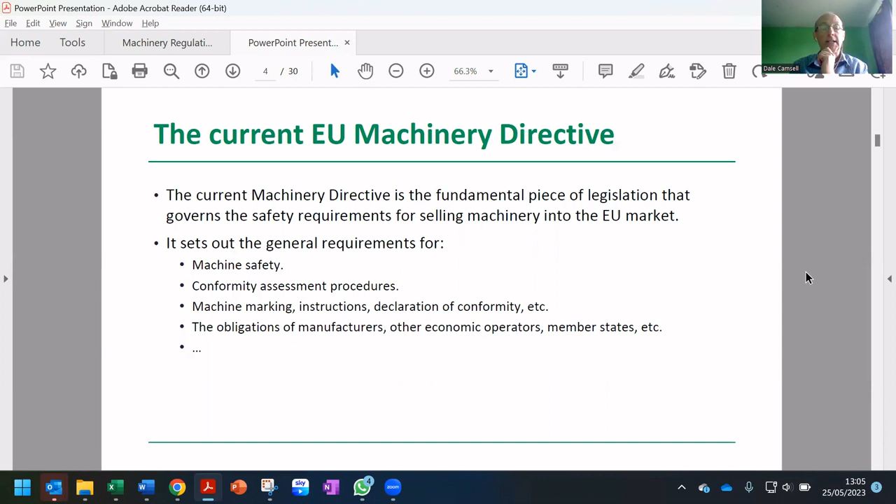So, today's topic then, the revision to the Machinery Directive, in other words, the creation of the new EU Machinery Regulation. The directive is the fundamental piece of legislation that is in place at the moment for putting machinery into the EU market. It sets out all the major requirements for all aspects of machine safety, and I've identified some, not all, of the major aspects of the directive there, and it's been in place for some time.

It was first published in 2006, but it's been in force since 2009, so some number of years, and due to that time lapse, the European Commission felt that there was a need to update it, mainly to take into account the rise in new technologies, those new technologies being artificial intelligence, autonomy, cyber threats, as well as other advancements in digital technology. So there was a need seen by the European Commission.

Not all stakeholders felt that it necessarily needed to be updated, and they felt the existing provisions adequately dealt with these aspects, but the European Commission and probably most member states felt the need. So the revision process has been underway for some considerable time, actually. We've seen more rapid progress in recent times, and we are just about on the threshold of it being published. I'll come on to the status in a moment.

Just want to highlight, though, before we go into the technical aspects, that although the UK has now long left the European Union, the CEA is still a main player in CECE, CECE being the Brussels-facing Pan-European Trade Association, of which CEA is a member. Our membership was not affected by Brexit, and we still play a very active and contributory role to CECE activity.

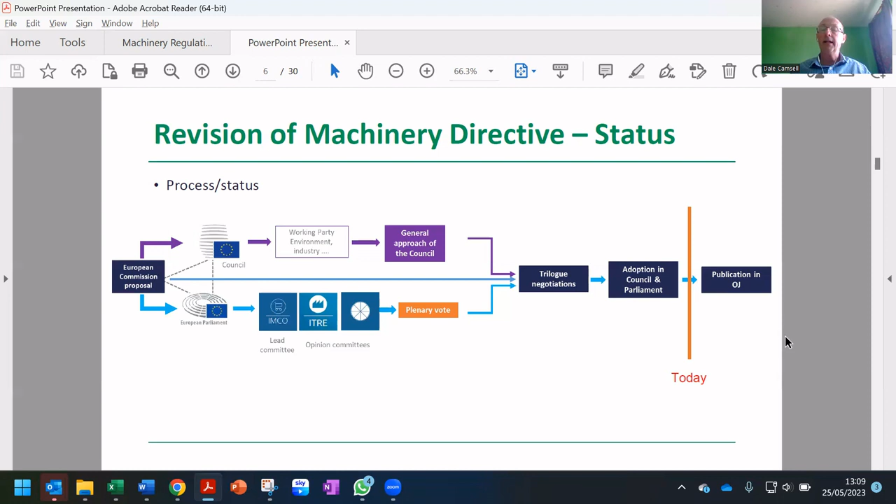The only outstanding items to go through are the legal linguistic checks, just to make sure that the regulation is fit for purpose and translates well. But in terms of all the technical aspects, that is all now complete. We haven't quite seen the publication of the regulation yet, but we are expecting to see it in early July, so very shortly should see the citation in the Official Journal of the European Union.

Sorry to use jargon, but this is the correct terminology, which basically means publication of the fixed and final text of the regulation. It will then enter into force 20 days later, so we would expect that to happen in late July. That's not really anything of consequence initially, at least for manufacturers in terms of compliance with machines. There then follows a 42-month transition period before the application date of the machinery regulation, and that means it will be applied from sometime around January 2027 if these dates are held.

On the same day as the machinery regulation is applied, the existing machinery directive will be repealed. So we'll have a switch over at midnight from one regulatory regime to the other. I'll come on to the challenges that will cause us in a moment, but just to say that the legal text will not formally become available until this happens, until July 2023. So a few weeks away yet.

However, the European Council is obliged to publish the documents that it is voting on, and since it has formally voted to approve the text, and the European Parliament had already voted to approve the text, what is likely to be the very final version of the text is available. That has been uploaded to the CEA's technical library. If you click on that link when you receive this document, you will be able to see it. The only changes that might happen between now and the publication, as I say, are following any legal linguistic changes, but that will be more grammatical changes, not changes to the substance of the text.

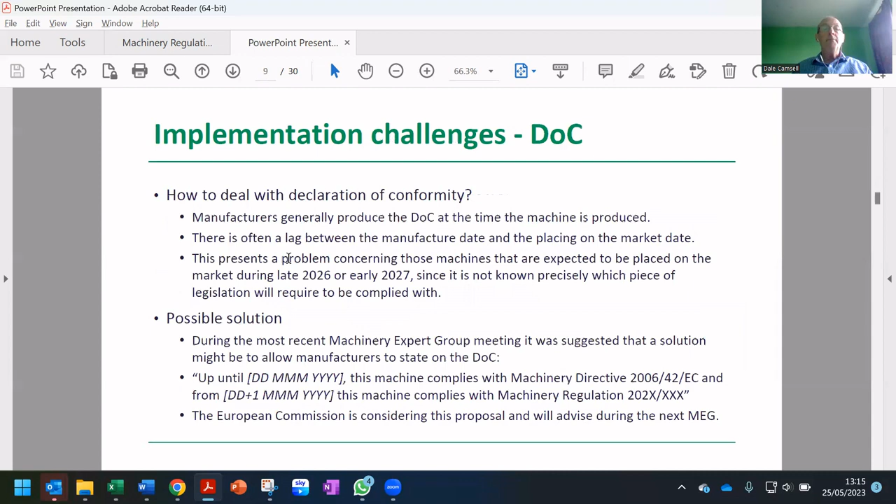So let's jump back again. A bit of a spoiler here. Digital instructions will be allowed. I'll come on to this later when I go into some of the technical details. So yeah, just jumping ahead slightly. Digital instructions are allowed, explicitly allowed in the new regulation, and we were hoping that they would be able to be implemented as soon as the entry into force of the new regulation is upon us.

However, because of this situation where at the moment the existing guide to the machinery directive states that paper instructions, so when I say instructions, I mean operator's manual. Different companies call them different things, but in legal terms it's the instructions. So the operator's manual is expected to be provided in paper at the moment because of the wording in the non-legally binding but highly regarded guide to the machinery directive.

So the solution proposed by industry here is that if the guide is revised to take out this expectation that paper instructions are to be delivered along with machinery, then that means that we could effectively implement the start of digital instructions before the application date of the regulation, because there isn't actually any contradiction between the two regulations. The existing directive does not say anything about the form of the instructions, it just says instructions have to be provided, whereas the new regulation says that digital instructions are allowed.

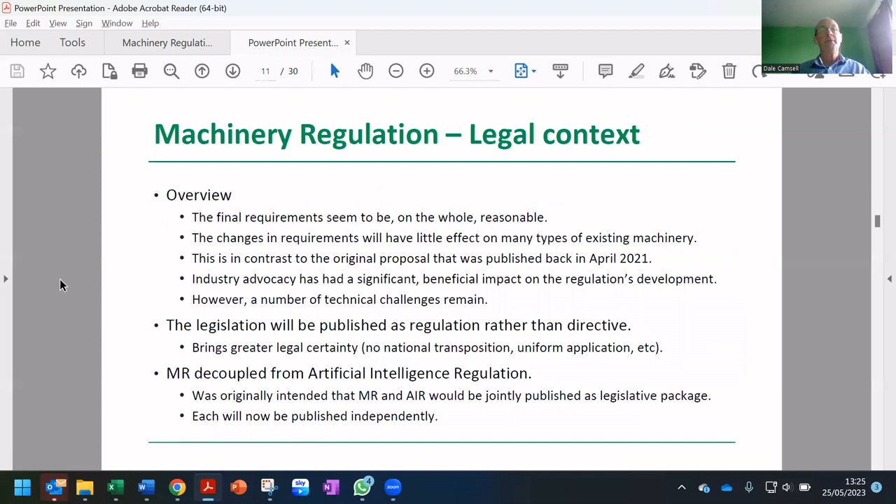Okay, so I already mentioned digital documentation and that digital instructions are explicitly allowed, which is great news. As I say, they are not mandated. If you wish to continue to produce paper instructions, then that is your prerogative. You can, though, if you wish, produce digital instructions, and of course, they offer many benefits to many stakeholders.

If you do provide digital instructions, then the information as to how to access them must be marked on the machine. So you could have a QR code, or you could simply have a web address as a sticker in a visible area on the machine, by which you could scan the QR code or enter the URL into the internet search and find the instructions. So you must obviously provide how to find the instructions, and they must be downloadable.

And also, this includes the situation where the instructions are embedded, which is more often the case in automotive, in cars these days. But if you do wish to put the instructions embedded in the interface with the operator, again, the instructions must be downloadable. They must remain available for download for 10 years after the product is placed on the market. So for machines in service, users can still download the instructions if need be.

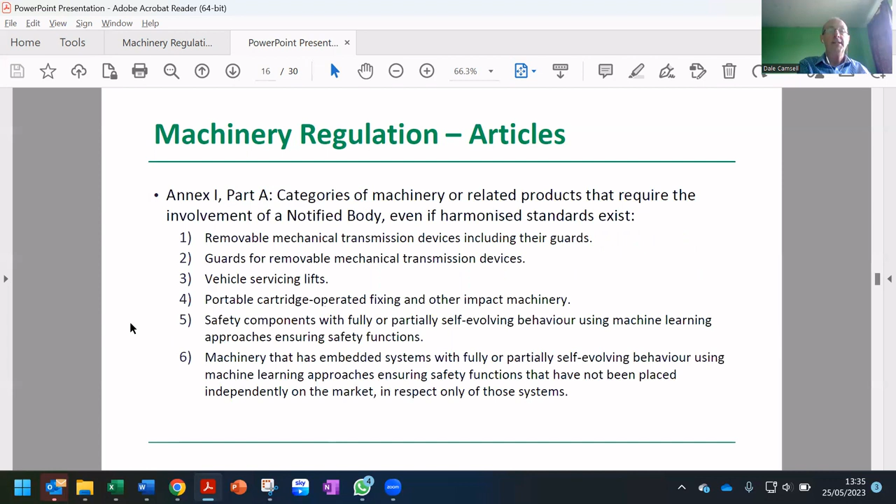That in itself is another chunk of legislation which we don't have time to go through today, and I would plan to include that in a future Power Hour for you. Excuse me.

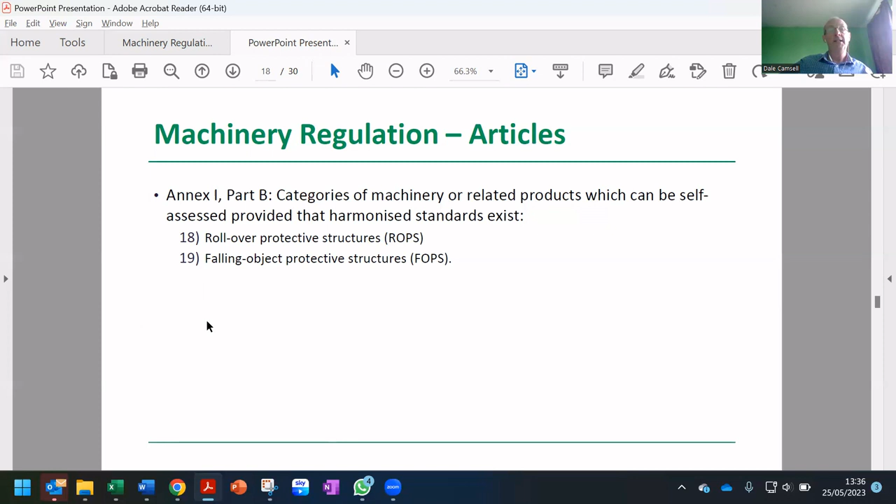So just for completeness, we also have Part B of Annex 1. This has 19 items in it, but I don't think the first 17 are of particular interest to this group, so I haven't listed them, but items 18 and 19 undoubtedly are. These are in Part B, so provided there are harmonised standards, which there are, manufacturers can continue to self-assess if they so wish. Of course, they can involve a notified body if they want. Originally, that self-assessment right was taken away in the original proposal, but through advocacy, we managed to bring that back, which is good news.

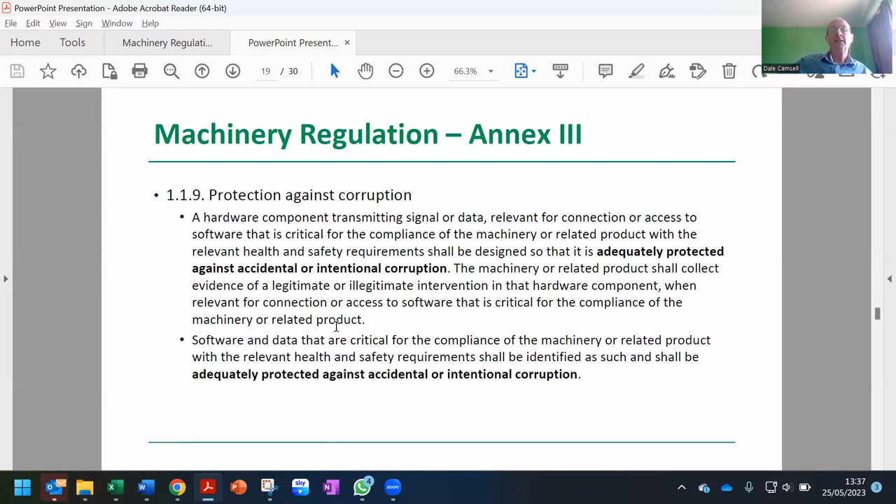Then we come on to Annex 3, and there are two closely linked essential health and safety requirements. 1.1.9, which is protection against corruption: basically the machine hardware that transmits signals or data must be adequately protected against accidental or intentional corruption. And software and data that is critical for the compliance must also be adequately protected against accidental or intentional corruption. And the same for section 1.2.1, which covers control systems, specifically the safety and reliability of control systems, and these must be adequately protected against accidental or intentional corruption.

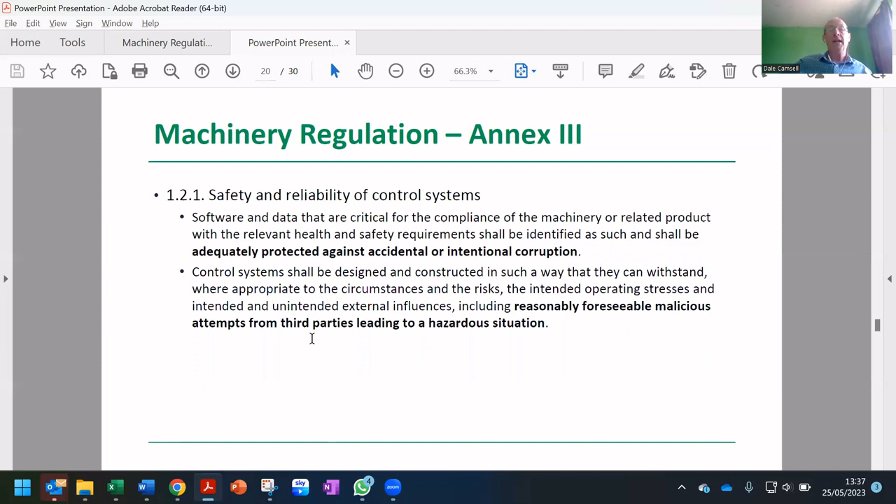The question again is, well, how do we do that? How do we adequately protect, and what is adequate protection? Well, for both of these clauses, the suggested way to comply would be through the Cyber Resilience Act. This is another piece of legislation, and you can see there's a network of legislation that all interlinks: the machinery regulation, the Cyber Resilience Act, the Radio Equipment Directive, which I'm not covering today, are all very intertwined in terms of how you get compliance.

But with regards to 1.1.9 and 1.2.1 of the machinery regulation, there is this new Cyber Resilience Act being developed, and there is an article in black and white in the Cyber Resilience Act to the effect that if you comply with it, you will be deemed to have complied with the cyber aspects of the machinery regulation. So that would be the route to compliance. It is also under development and is expected to be published around this time or the middle of next year.

Harmonised standards will also be produced. There is a real challenge here in getting those standards ready in time, but harmonised standards will be produced in order to provide a route to compliance with the CRA, and therefore a route to compliance with the cyber aspects of the machinery regulation. So that is a rather long-winded and complex route to compliance, but that is how it should be done.

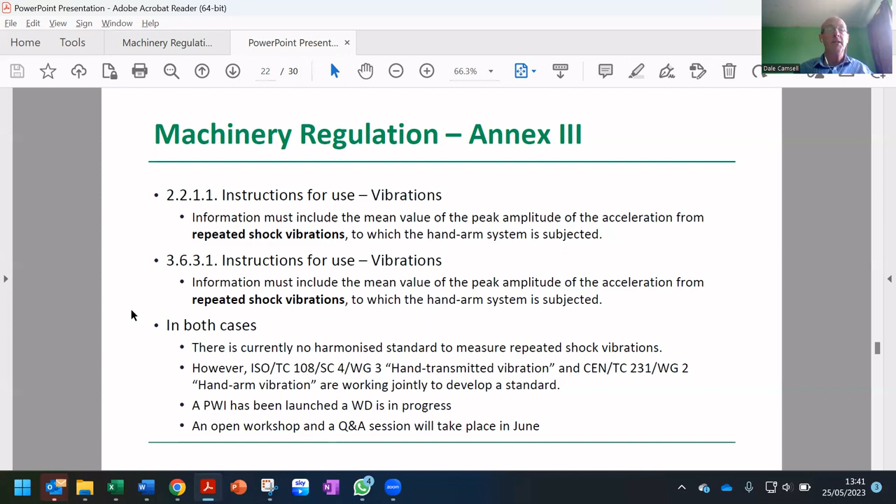So because this starts with a 2, this means it covers handheld and hand-guided equipment. So that could be pedestrian rollers or any other pedestrian type equipment that people produce, where the hand is directly on the machine. Wouldn't include remote control machines, and 3631 is for mobile machinery, so where the operator is probably sat or maybe stood on the machine and it's in a mobile form. So those items initially caused raised eyebrows, but provided that this joint committee work between ISO and CEN committees is completed on time, then again we should have a route to compliance with these requirements.

This, of course, is a very stringent requirement. I mean, there's nothing in automotive to require that a car cannot move until your seatbelt is done. Yes, you might get an annoying beeping sound if you drive without the seatbelt engaged, but it is possible to move. And of course, cars move at high speed in very congested areas. So it does seem maybe disproportionate. However, despite our best efforts, this clause remained and is still in the final text. So we're stuck with it. So we're now finding ways to deal with it.

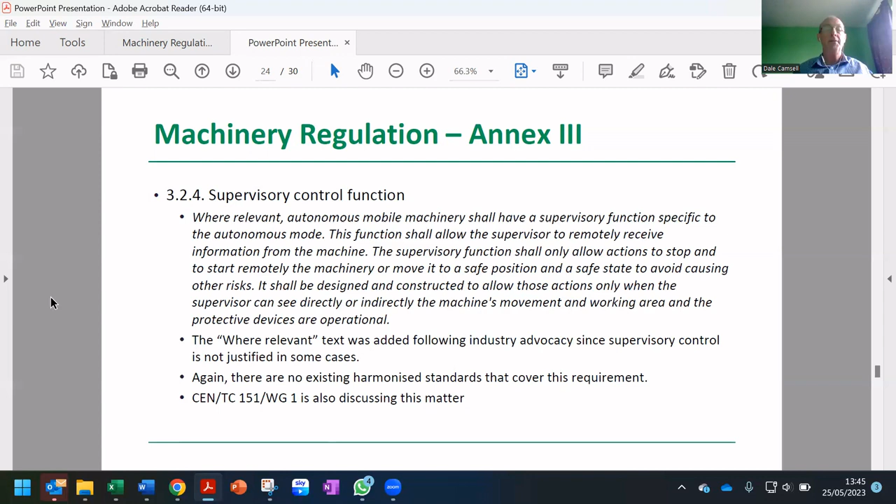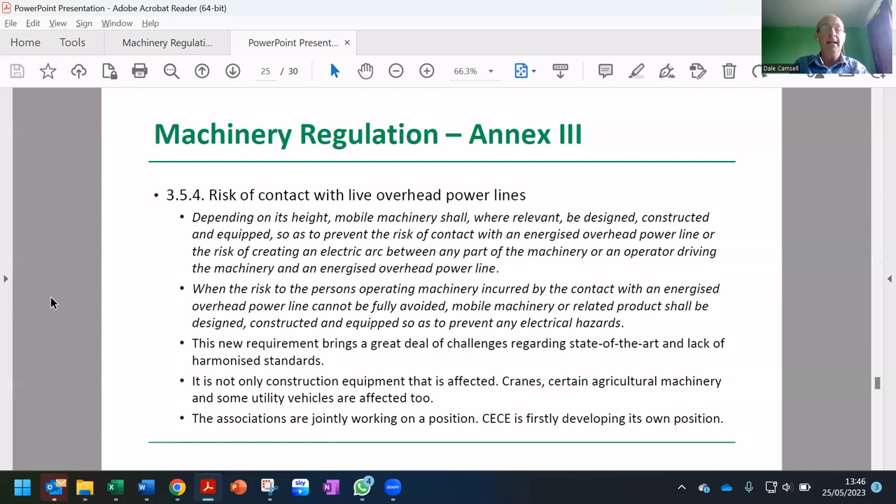We have a number of problems and challenges in interpreting this requirement and how to apply it in a way that meets the objectives, the intention of the European Commission and the other two sets of legislators. So again, we're working on this. We're at a relatively early stage, but this is a real head scratcher, this one. It's fraught with problems, but the text is fixed, the text is final, so we will have to work with other parties in order to find a means that we can comply with this.

So I mentioned harmonised standards a couple of times. One of the very good things that the European Commission have done in the development of the regulation, although there's nothing in the regulation at the moment to say this, they are intending to provide a further annex to the regulation, and in that they will give legal clearance for existing harmonized standards that provide a presumption of conformity with the existing directive, that in the case where the regulation does not change the essential health and safety requirements that are covered by that standard, the standard can continue to provide a presumption of conformity with the new regulation without any modifications to it.

As a minimum, we had previously expected that even if there were no changes to the essential health and safety requirements that the standard covers, nevertheless, the references to the regulation will have to change because the numbering sequences and the annex numbers have all changed. So we would expect, if nothing else, to have to undertake editorial changes, as well as all the technical changes, some of which I've just covered. Well, in the case where only editorial changes are required to update the references, we're expecting the European Commission to give us some form of allowance that would enable the existing harmonised standards to continue their presumption of conformity with the regulation. We don't know exactly how that will work at the moment. We're working closely with the European standardisation bodies and with the European Commission to find a workable solution.

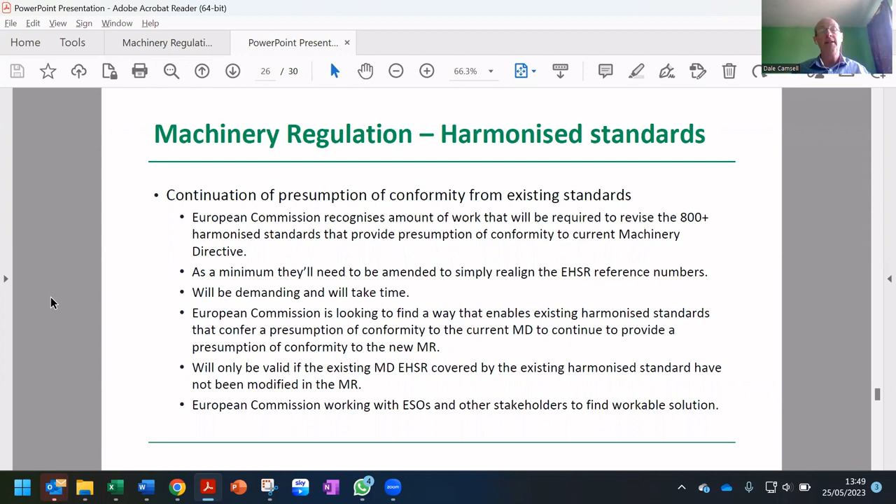We're obviously very, very welcoming of this because it means we can do all the editorial work later and we can just focus our attention right now on those tricky technical challenges that we have in updating the technical aspects of some of the standards, and we can then deal with these later. So we're very welcoming of this, but we're not sure exactly how it would work, but we are doing our best to find a way to make it work.

So guidance. I mentioned interpretation is going to be tricky on some of these items, and that certainly is the case. And so we all feel that an update to the existing guide is needed. The guide is a document that is produced by the European Commission. And it provides an interpretation of what the intention of the essential health and safety requirements and the articles in any piece of legislation is. And we felt, because of all the changes, that guidance was essential.

Not just us, but also a number of member states felt that this was a given, that the guidance would be updated. The European Commission didn't see things the same way, and with the best of intentions, their plan was that the legal text in the regulation would be so clear that guidance would not be necessary. They felt that guidance was a means of flagging failure on their behalf of providing regulatory clarity, but this obviously is not the case because they've been inundated with questions on clarifying and providing legal certainty on the text of the regulation.

So they've changed their tune, which we welcome. They haven't committed to a timeline. In fact, they haven't really committed much in the way of resource, but they certainly have now said they fully understand why we are asking for guidance.